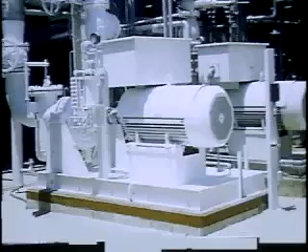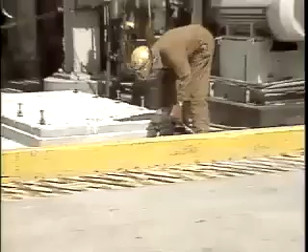This training video will demonstrate the proper techniques for grouting of API and other types of pump bases. Several types of Chockfast grouting materials may be used for grouting pump bases. However, this video will show the use of Chockfast Red.

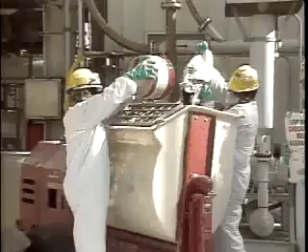Improperly grouted pumps will often have more vibration and alignment problems that can result in frequent bearing, mechanical seal, and coupling failures. Bearings, mechanical seals, and coupling designs are often blamed for these problems, but in many cases improper base plate grouting is the cause.

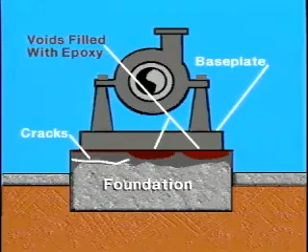For years, cement grout was used to install pump base plates, but due to shrinkage and the poor adhesive qualities of cementitious grouts, pressure injection of the base plate with epoxy resin is required to fill voids. In the case of improperly grouted base plates or base plates that have disbonded from the grout, pressure injection is a reasonably adequate repair method. Voids can be located by tapping the top of the base plate with a hammer.

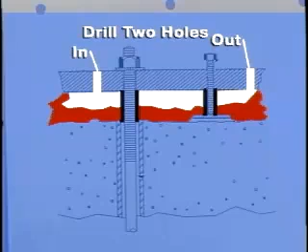After locating the voids, drill and tap 2 holes through the top of the base plate at opposite ends of the void area. One hole will serve as the injection point and the other as a vent hole. Using a handheld grease gun, fill the voids with the blended Philly-Fast pressure injection material or Chockfast Red resin and hardener.

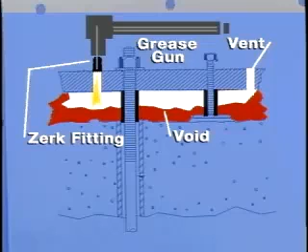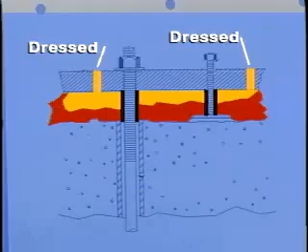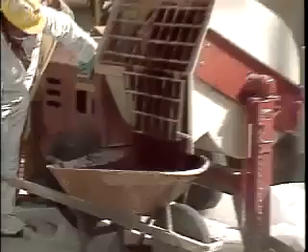After the void is filled, plug the vent hole and allow the pressure injection material to properly cure. After complete cure, the pressure injection fittings can be removed and the holes dressed. In this program, we'll demonstrate how to use Chockfast Red epoxy grout for a typical API pump installation. In doing so, we'll demonstrate foundation preparation, base plate cleaning and leveling, grout preconditioning, and proper mixing and pouring procedures.

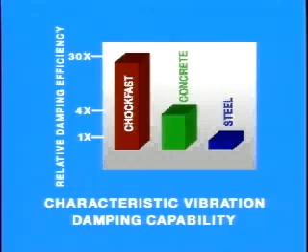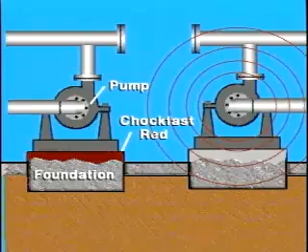Chockfast Red will bond to the base plate and the concrete foundation, forming a monolithic block, which helps lower the natural frequency of the base plate, thereby reducing vibration. The Chockfast Red also protects the foundation from degradation due to chemicals, oil, water, etc. The foundation must be adequately designed to support the pump and driver. It must rest on solid earth and remain isolated from any other transient vibration sources. The total unit is made up of the pump, base plate, grout section, anchor bolts, and the principal foundation.

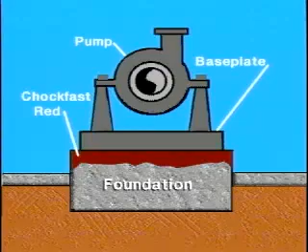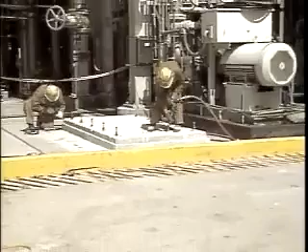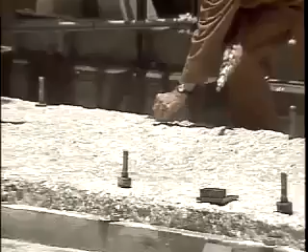The top surface of the concrete foundation must be chipped down in order to remove any laitance and to expose a minimum of 50% of the coarse aggregate in the concrete. This is accomplished by using a small chipping gun. Horizontal foundation edges should be chamfered to at least 2 to 4 inches at a 45-degree angle. The foundation must be clean, dry, and free of any contaminants such as water, oil, grease, concrete dust, etc. that could affect the bond of the Chockfast Red to the foundation.

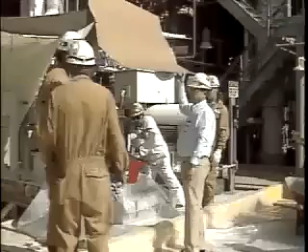To protect the foundation and provide environmental control, erect a temporary structure around the foundation to eliminate the possibility of rainwater or other contaminants contacting the properly prepared concrete surface. This temporary enclosure is very important in the case of extreme cold or hot ambient temperatures. If the ambient temperature is below 65 degrees Fahrenheit, then it is necessary to heat the surrounding area, and likewise during the hot summer months to prevent the sun from providing excess heat to the foundation and pump base plate during the grout pour and while the grout is curing.

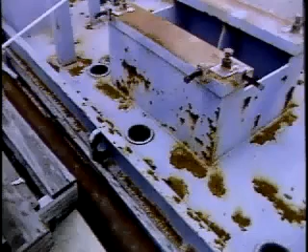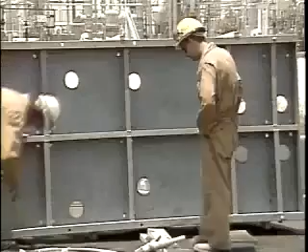Now we turn our attention to the base plate, which has been stored outside for some time. As can be seen, it needs attention. The procedures that follow also apply for regrouting of existing pump base plates. The underside of the base plate should be inspected and any additional grout pour holes, vent holes, or jack screw holes installed. It is imperative that each compartment of the pump base plate have at least one grout fill hole and an adequate number of vent holes.

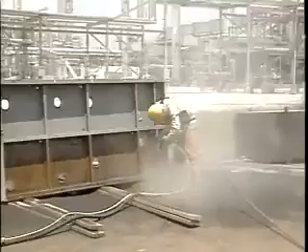Vertical and horizontal edges of the base plate that will come in contact with the Chockfast Red should be ground to a minimum of a ½ inch radius to reduce the possibility of stress concentrations in the grout. The underside of the base plate should be sandblasted to white metal in order to ensure a proper bond to the epoxy grout.

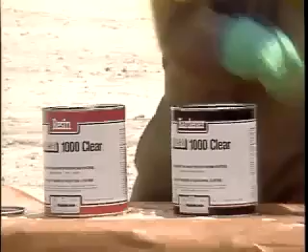Care should be taken to prevent the sandblasted surface from becoming contaminated by oil, water, etc. The elapsed time between sandblasting the pump base and the actual grouting should not be so long as to allow the sandblasted surface to bloom with surface rust. To prevent this, prime the base plate underside with Philclad 1000 series primer. Philclad 1000 will create a bond to steel of no less than 1500 psi and have a dry film thickness of 2 to 3 mils.

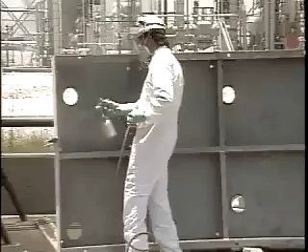Proper blending is accomplished by pouring the hardener into the resin container and mixing for 3 to 4 minutes with a properly sized Jiffy mixer and a drill speed of 200 to 250 RPM. Pour the blended Philclad 1000 into the spray rig and coat the entire underside of the pump base. If the base plate is not grouted within 30 days, the coated surface should be roughened up to remove the bloom or shine. The surface should be clean and dry prior to grouting.